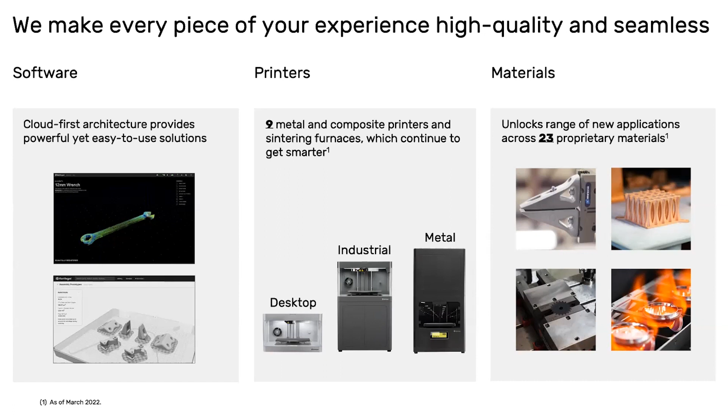So that starts with our software. When you upload your part, slice it, and set it up for success. We've spent a bunch of time and effort to curate and cultivate an experience that's really seamless, simple, and easy for you to use, where you kind of get the highest ratio of limited user input to great parts out with a bunch of great capabilities. I'll talk a little bit about the materials and the hardware in a second here.

The printers themselves are purpose-built to print really, really great quality every time. So if you've taken a look at our website, you've probably seen all the little details that go into making these printers super robust and accurate. I call attention to the unibody chassis of solid hunk of aluminum under the hood of the printer that helps to resist sort of the micro torques that arise from the belt drive system.

And we've got 9 printers across the fleet that are really sort of purpose built to address different stages of the product lifecycle and different applications. We'll talk a lot about applications in the context of this call today.

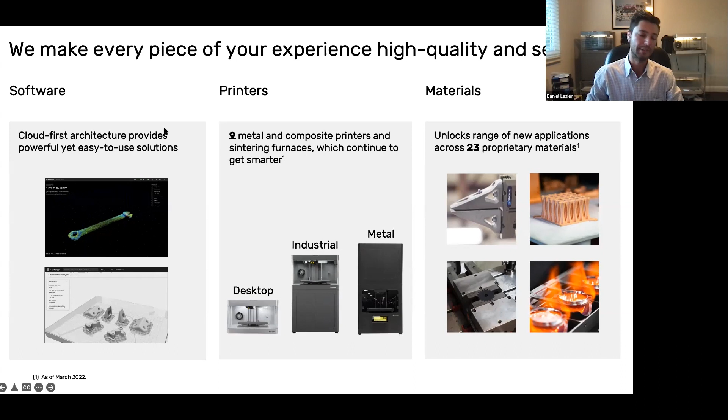With the introduction of Precise PLA, we've now got 23 unique and proprietary materials. I think that if I were to take one point from this slide, it's that each of these elements, software, printers, materials, are all tightly integrated so that the interfaces between them really feel like one unified experience. And this really results in a great end user output that really sort of manifests itself in the quality of the parts that I get every time out of the printer.

Just to shine a spotlight on the hardware itself, if you're looking at my camera screen here, you can see I'm lucky enough to have 3 of these machines in my home here. I've got the industrial series over my right shoulder here. I got the desktop series. I'd like you to meet Laura at the top there. This is Sherman down below. Over my right here, this is Big Mike. So we got a happy little family here in my home office in San Diego, California.

So the desktop series is our most mature platform of all of these. Our first generation we launched back in 2014, but this latest iteration of it came out in 2016. And it's really devoted to professional use cases, but it's simple enough to go right on your desk. I contend this is the most powerful manufacturing equipment you can fit on your desk. And it takes about the power of 1.5 light bulbs to run it, which is pretty crazy when you think about the kind of use cases and applications you can address with that piece of equipment.

The industrial series is sort of the broader extension of that platform, purpose-built to address more nuanced applications where I might need flame retardant materials or ESD safe materials. The really cool thing about the industrial series is that it brings in a layer of automation and accuracy by way of, it's actually equipped with a laser on board. That laser not only does calibration at the front end of your print process, it can also do inspection and some automated quality control on board that machine.

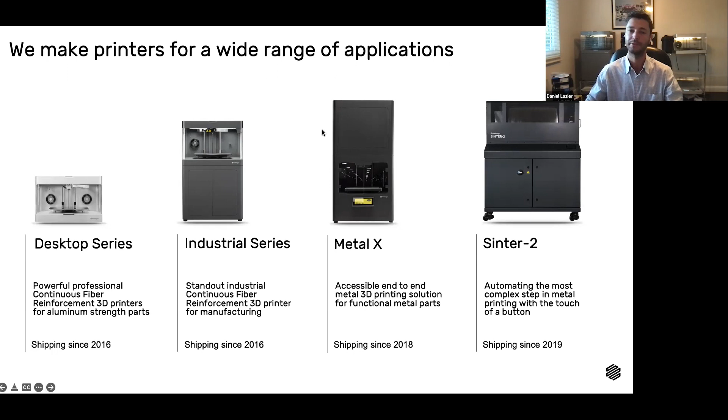We do have a pretty impressive range of plastics themselves. So Onyx is a material that we invented. Onyx is a nylon that itself is doped with chopped carbon fiber particles. Those chopped carbon fiber particles do a couple cool things to the part. So one, it makes it stronger, boosts the strength by about 40%. The second thing it does is it actually makes it a lot more stable from a print process standpoint. The chopped carbon fiber causes the nylon to have a lower coefficient of thermal expansion, meaning you're going to get less warping, peeling. Some of the usual suspects from the early days of 3D printing with ABS and PLA that make it a little bit more frustrating to use.

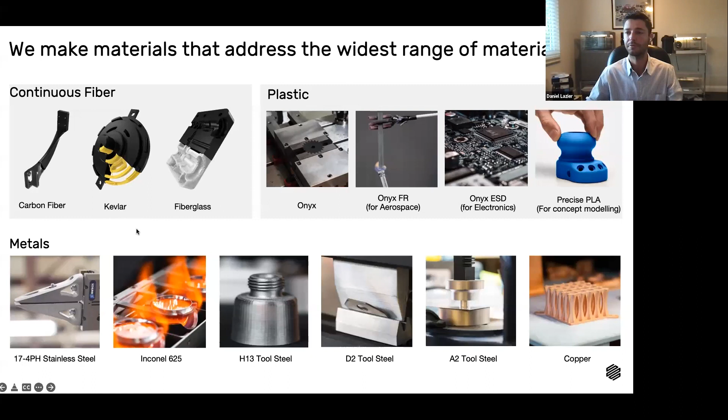I'll briefly mention, so the metals, less of a focus of today's conversation, but we started off when we released the system with 17-4 stainless steel, which is great for sort of generalist high strength prototyping applications. And then from there we went into some specialty tool steels, including H13 tool steel, D2, A2 tool steel. And then we have some specialty alloys as well. So we have Inconel 625, which is great for temperature resistance and chemical resistance. And then our most recent addition to this library is copper, which of course is great for both electrical and thermal conductivity.

So let's talk a little bit more about this Precise PLA. What is it? What makes it precise? What colors can I use it for? Just some of the basics here. So Precise PLA comes in 8 different colors. So we got gray, blue, green, red, orange, yellow, white, and black, which is a pretty comprehensive library.

I've been having a blast printing with it myself. One of the things, it's not complete yet, but I downloaded this excavator design, which I'm printing for my nephew. I'm seeing him this weekend. So I've been having a lot of fun with it, and the quality's been great.

What makes it Precise PLA? What makes it different from other PLA? Really, the secret sauce, if I were to point to any one thing, is again this tight integration between the materials, the printers, and the software. So the team put just an insane amount of time into testing a bunch of different geometries across a bunch of different print profiles, and sort of purpose tuning the system to print our precise version of PLA with incredible accuracy and repeatability. So when I put that material into the printer, I know it's gonna have a great part out every time.

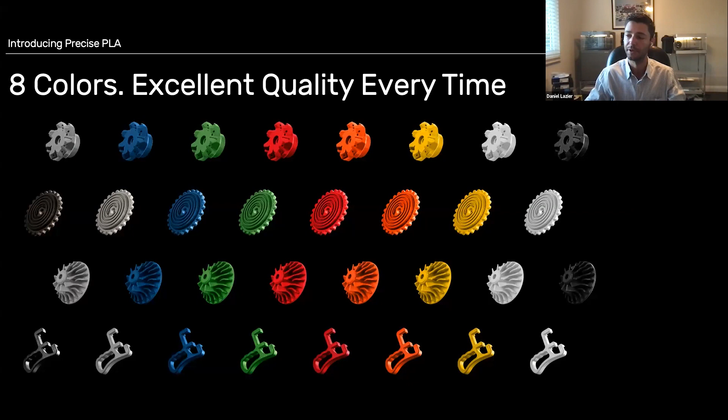So at the low end, we have the Onyx One. That's our lowest cost offering, just shy of $5,000. And the Onyx One, it just prints Onyx. I like to think of it kind of like the In-N-Out hamburger, which we have here on the West Coast of the United States. They really just do one thing, and they do it super well with great repeatability. And that's really what makes that print system great. People love this printer because of its simplicity and just the consistency with which it prints that material.

The Onyx Pro is our next offering up this line, which is around $9,600 US. That print system does Onyx with Precise PLA. So that's the first one that introduces these materials devoted to concept modeling. And it also brings to the table the continuous fiberglass material, which is really great for moderate loads. So I would think of tools, fixtures, robot grippers, all those pretty solid applications for continuous fiberglass.

The Mark Two is our top of the line printer here. That's about $20,000 US. So that's gonna bring into the platform, incremental to the Onyx Pro, a different plastic which we call nylon white. It's just a general nylon. Really where people use that is bushings, bearing surfaces, things that need low surface friction.

And then I'm adding a couple incremental continuous fibers here too. I'm bringing in carbon fiber, I'm bringing in continuous Kevlar, and then beyond just the base fiberglass, I actually have a fiberglass devoted to high strength and high temperature applications. That's really great if I need to make prototype injection mold tools, or potentially welding fixtures or other things that are going to be exposed to a lot of heat.

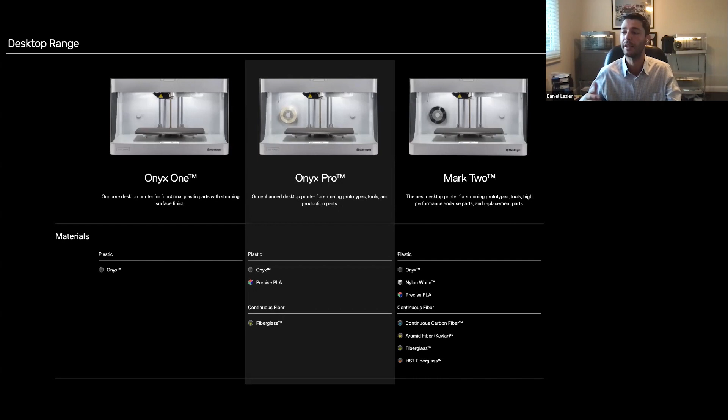So to summarize what we've got on the desktop series: we've got the fibers, we've got Onyx, we also have nylon white not pictured here, and we've got Precise PLA. And when I look at this materials list, I'm not really wanting for any additional material. When I imagine the kind of things that I want to do in manufacturing, I'm generally looking for great tensile strength, great compressive strength, great impact resistance, great heat resistance, great chemical resistance, low cost for prototypes. And when I think about all those attributes, this really covers that well.

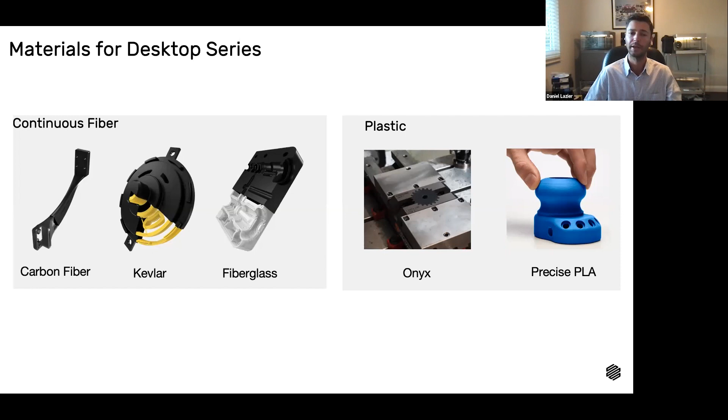So when I line up those requirements and compare them to what else is commercially available today, across these properties, tensile strength, temp resistance, chemical resistance, impact resistance, cost effectiveness for prototyping, the surface finish, Onyx has this really stable print process. I can show you this part here. It almost looks injection molded because I can't see the layer lines on it. So when I add up all these properties, we're covering the most expansive set of properties with a versatility that's unmatched across other desktop FFF machines.

FFF, for those unfamiliar, stands for fused filament fabrication. You might also be familiar with the term FDM, which was coined, I believe, by Stratasys. That really just means I'm extruding a material from a spool out of a hot nozzle.

We have more of a comment here about the pricing. That's a decision-making factor in how people look at this, specifically the cost effectiveness on a per part basis. Before we released Precise PLA, a lot of customers told us, "Hey, I love your equipment, but I'm only sticking with tooling or production parts on my Markforged platform. When I need cost-effective prototypes or concept models or fit checks, that could be accomplished on a lower cost machine."

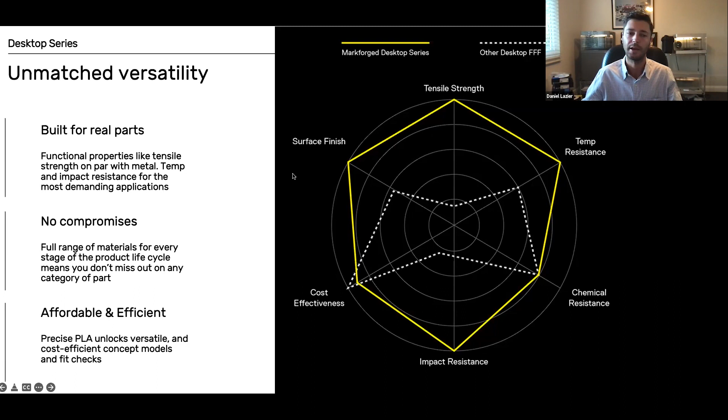Cool. So just moving along. I mentioned different applications, different phases of the product life cycle. I'd like to spend a little time talking about the application itself. So dividing this up by the product life cycle phase: Do I need a visual prototype? Do I need a functional prototype? Do I need a tool or fixture? Or am I actually looking at production parts?

I would really recommend Precise PLA anytime you're looking for something that needs a pretty solid appearance and accuracy. I need some colors, or I need low cost. That's going to be the realm of use cases where we would definitely recommend Precise PLA.

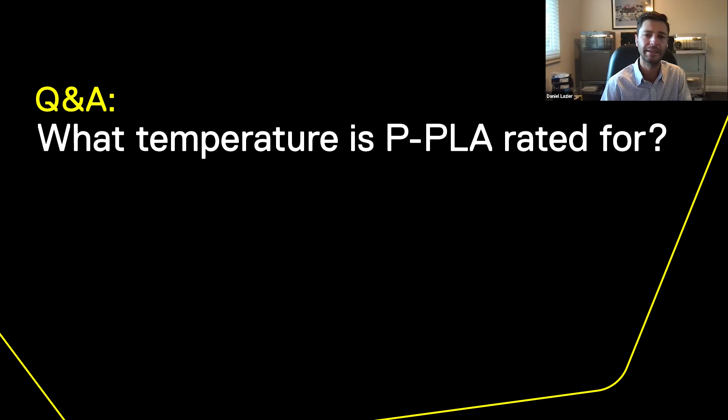There's a question here about the temperature that Precise PLA is rated for. I believe we have that heat deflection temperature in that data sheet. I think it's somewhere around 50 Celsius.

Another question here about dimensional accuracy. We haven't characterized the accuracy of Precise PLA yet. It's something we're in the process of doing. But what I will say is generally, if you're looking for super precise, super accurate parts, Precise PLA is going to be a great entry point to that. I've been finding that my Onyx parts and my fiberglass and carbon fiber parts generally come out with slightly better accuracy. I know that's not a numerical answer, but just qualitatively, that's what I've observed just printing on my own.

Cool. So getting back to this application map here. So I mentioned we do Precise PLA for whenever I need low cost or colored concept models, fit checks, and prototypes. When would I go to Onyx? It's really when I need a great surface finish or if I need an incremental boost in either accuracy or strength. So we see customers using both of those materials for prototyping, depending on what the technical requirements are.

In fact, I've also seen people that need great strength in their prototypes. They need to validate a design and actually apply physical loads to it. In which case, we see customers going to Onyx and fiberglass, or even something sturdier like carbon fiber. Beyond that, let's say we really need some really functional tools. So sometimes I need like a robot gripper or a work holding tool that's going to hold something in a machine vise. And sometimes those things actually need a pretty good boost in strength. In those cases, I would go to Onyx and I would reinforce it with fiberglass.

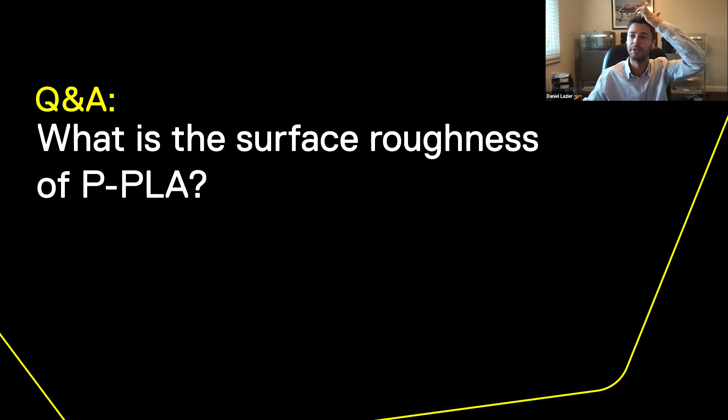What I would recommend is if you're really looking carefully at the system and the Markforged platform, either come find us at a trade show or meet up with one of our value-added resellers, where you can just go observe some of these parts in person. Again, I'll try to showcase this part that I printed this morning. It's actually quite difficult to even see the layer lines that are typical of a 3D printed part.

Another fun question here: is there a recommended bonding method, either two-part adhesive or chemical welding, for each of these materials? I'm not quite as sure for Precise PLA. Let me file that away as something to follow up on. But frankly, just your typical super glue, cyanoacrylate, is a really good start. Specifically, Loctite 401 is a subclass of that that actually forms a really great, super strong chemical bond between two Onyx parts.

I think there's a separate Loctite that does really well for Onyx to metal parts. There's also a Scotch-Weld adhesive that works really well for Onyx to metal parts. For Precise PLA, I've done a couple parts where I just use your typical cyanoacrylate super glue.

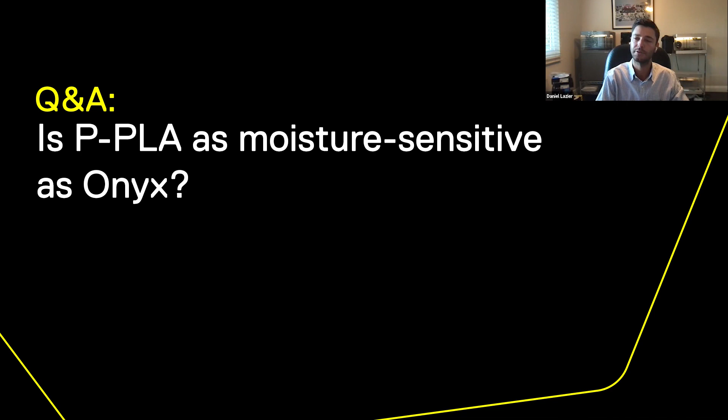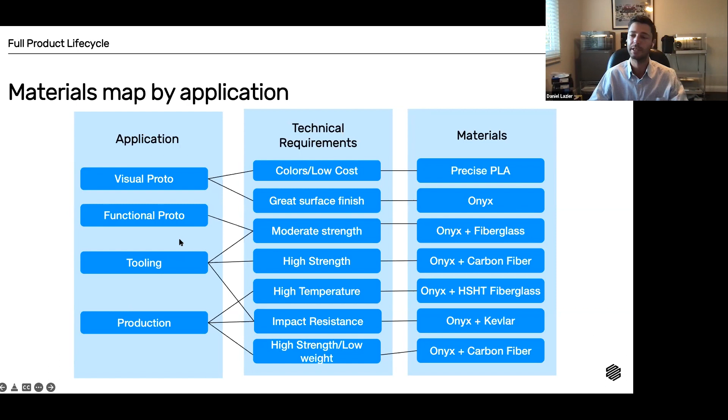Cool. So getting back to the slide here, the overall takeaway between the last slide that showed that radar chart and this slide that actually maps out these materials' different applications: we have a really broad range of use cases that you can address with just one printer on one platform. That really brings to you as users a versatility and a set of capabilities that you really can't match with any other FFF style printer.

So to give you a practical example here, this is a bracket that I worked on with a customer, an academic institution that's competing in Formula SAE, which is a national competition where they actually develop a race car. This bracket here is a bell crank suspension specifically for that race car, and it's got to be lightweight, it's got to be strong, and it's got to be accurate. So when I first started down this road of designing this thing, I first wanted to check to make sure the thing fits.

So going from back to front in the process, I first took the design itself and just made a shape that fit. In the next phase, I started to whittle away some material to make some weight optimizations and also do some design for assembly stuff, to make it a little easier for the whole thing to come together. In this third iteration, now I'm really starting to get this thing optimized for weight. I've got all of the different hardware and fitting and other mechanical and design considerations in there. And then I finally end up at my final part, which I've made with Onyx reinforced with continuous carbon fiber. And now that part is fully optimized and ready for production.

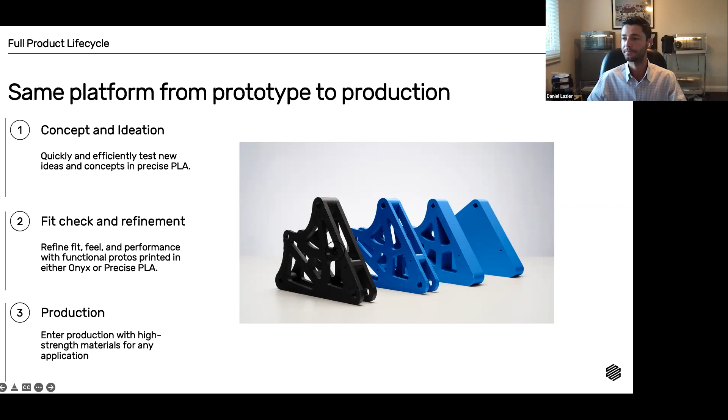Separate question here: would Precise PLA be satisfactory for takeout dining utensils? Again, we don't really have anything in the platform that's devoted to food safe use cases or applications. But again, that's going to be something that we should just kind of keep an eye on as we continue to innovate and deliver new materials.

Is there a possibility to export the Eiger model with its infill to do finite element analysis? We don't have that tool today, but what I will say is our software is getting smarter. Like I think I see an update come through on Eiger every week or two. So that's another case where we don't have it today, but it's certainly something we see our customers have a need for.

Got a question specific to the metal printers. Not exactly the focus of conversation today, but I think it's relevant in that we have a question here about downtime for alternating materials on the metal printers. Across all of our print systems, they're all just fed by a spool. So the process takes 2 to 3 minutes of just heating up the printer, getting the material flowing through the nozzle, snipping it where we want to cut it off, and then loading up the next spool of material.

So whether I'm changing from 17-4 stainless steel to copper on my metal printer, or if I'm switching from Precise PLA to Onyx on my composite printer, that process is a matter of minutes, and it's super simple. Cool. Again, thanks for the questions, and keep them coming.

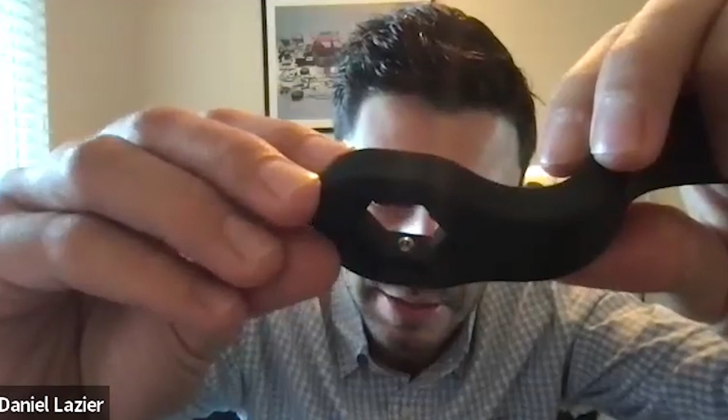It needs to be relatively attractive because it's going to be a production part that's actually going to be facing customers. So you can see I've actually labeled this thing with this carbon fiber, and that came out really smooth and slick. And then really maybe the most interesting feature of this part is I've actually pressed in a secondary set of hardware in the form of these little ball detents, which you can see under the surface here. And really what that's for is this socket, which itself was printed on our MetalX platform.

So what happens is with those ball detents, when I snap this part in, it has this really satisfying kind of almost production feel to it. Very satisfying, very ergonomic, and sort of has that almost Apple level quality of usage and the feel to it.

And this is great here because I see there's another question about what's the price comparison of Precise PLA with some of our other materials. So Onyx is $189 per 800 cc spool of material. Precise PLA comes in 600 cc spools, and that material is going to go for about $50. So in practice, when you're comparing apples to apples volumetrically, Precise PLA is a little over a third of the price of Onyx.

And I'm actually going to show you in practice when I was designing this wrench and fine tuning that nice satisfying feel along with how I wanted this handle to feel and how I wanted that text to show up, I did a bunch of iterations of that part. And I was actually conscious about the price of these parts. So for that reason, I wanted to stick in PLA before I moved to the more expensive materials. So let's go ahead and explore that process now.

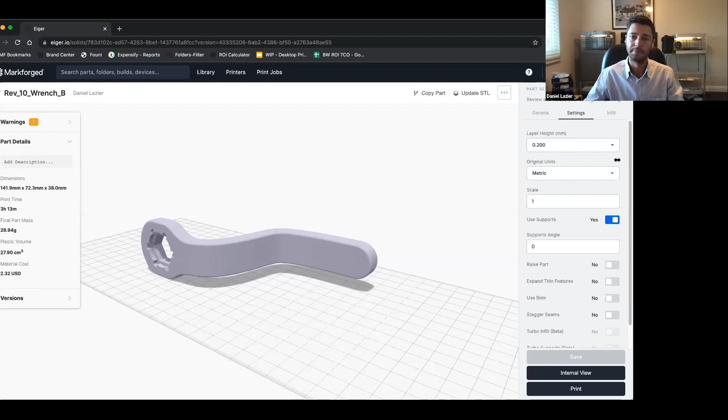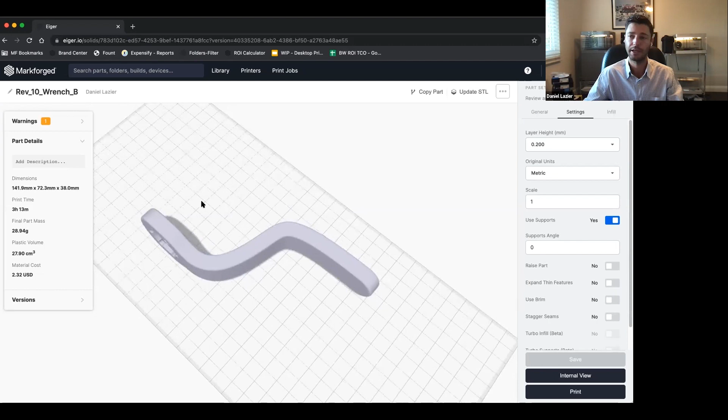So this is Eiger. If you're not familiar with Eiger, it's our cloud-based slicer and parts management platform. It's super simple to use. It's accessible anywhere. You can access it from Google Chrome. So all I do to get here is I type in eiger.io and then it takes me here. You can register and create a free account at any point. And you really never have to pay for it unless you're accessing some of our Fleet Eiger capabilities, which are devoted to doing some interesting team management, version control type of processes.

So I've got this part set up to print in Precise PLA. In this case, I've selected red material. I can really select any color.

And I have it printing at 200 microns, which I would think of almost as a draft mode. And then in this panel here on the left side, what's kind of cool about Eiger is it's always keeping track of how much material I'm using, what the print time is going to be, and what it's going to cost me. So in this case, this is going to cost me $2.30. Not bad for a part that's pretty substantial in volume.

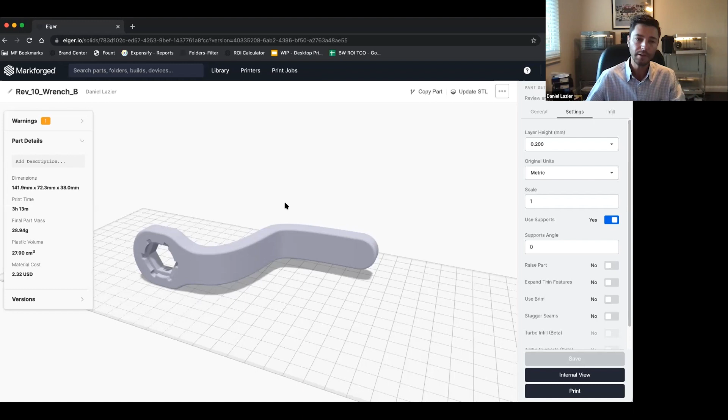I've got some support material in there. This is a cost and print time where I feel comfortable doing a lot of iterations to really go for style points, which really gives me the freedom to ideate and create and really get to that fine tune.

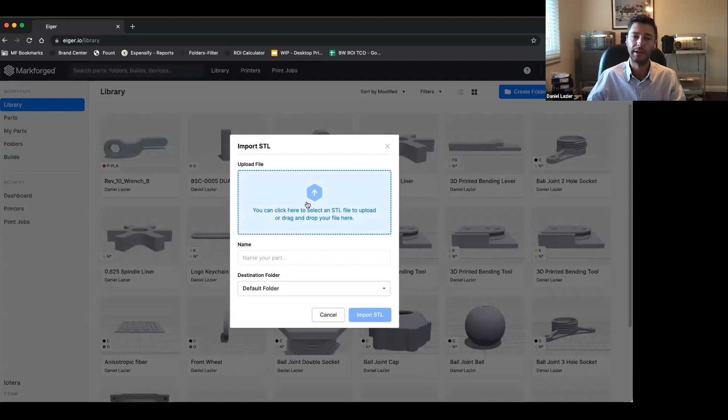A couple of questions here. Which commercial software is your software compatible with? So when I want to bring a part into Eiger, let's just back up into my part library here. All I do is import what's called an STL file. STL files are exportable from pretty much any CAD software. So let's do that bell crank that we looked at before. This is a component of that assembly.

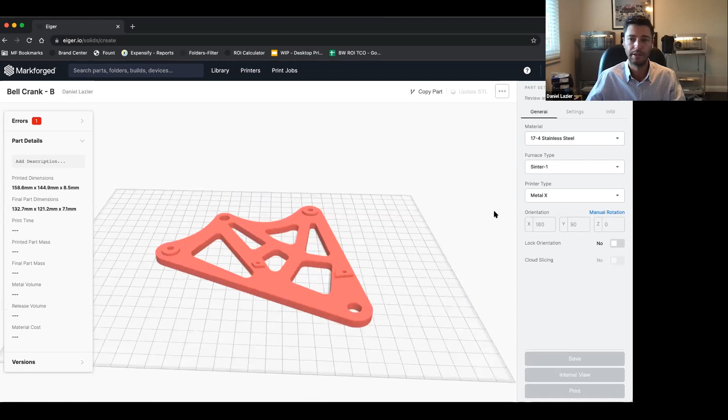So all I do is import the STL and then bring it in. And then let's say I want it to be Precise PLA. So that's all that it takes to go from your CAD software to our Eiger software. Super simple to use, very quick and efficient. And again, any CAD platform you use, whether it's Autodesk, SolidWorks, or PTC, all of those software platforms are going to have the capability to export an STL file.

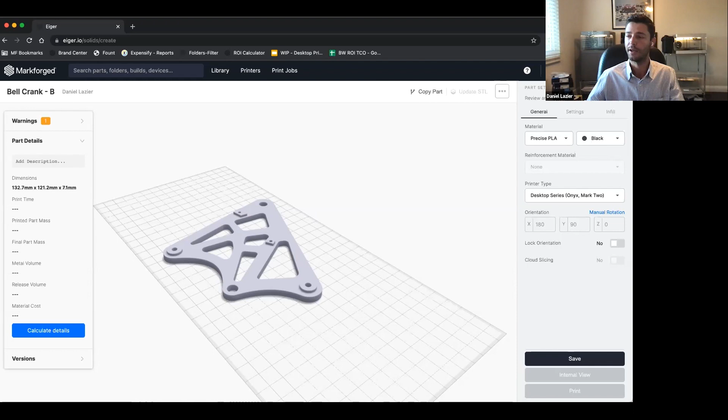Another question here. When will Precise PLA be available for purchase in Brazil? If I'm not mistaken, we have partners already in Brazil that have ordered some. We can definitely follow up on the back end and get you in touch with the people that are supplying that in Brazil.

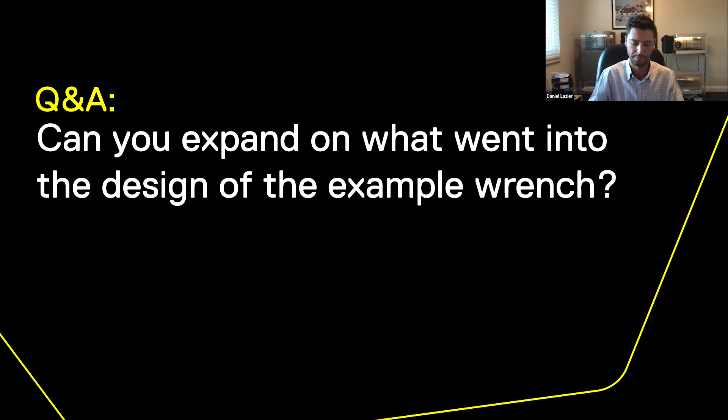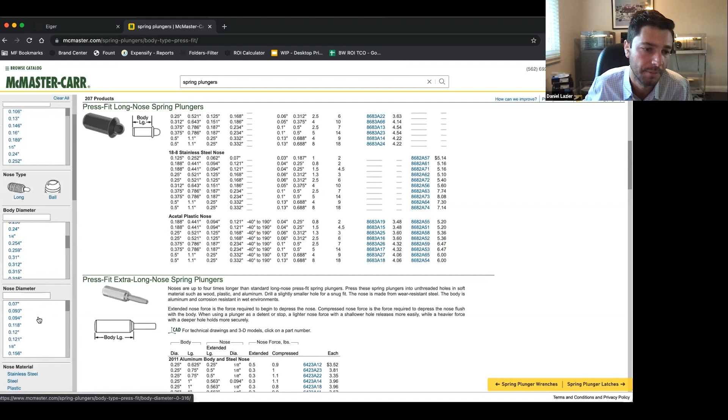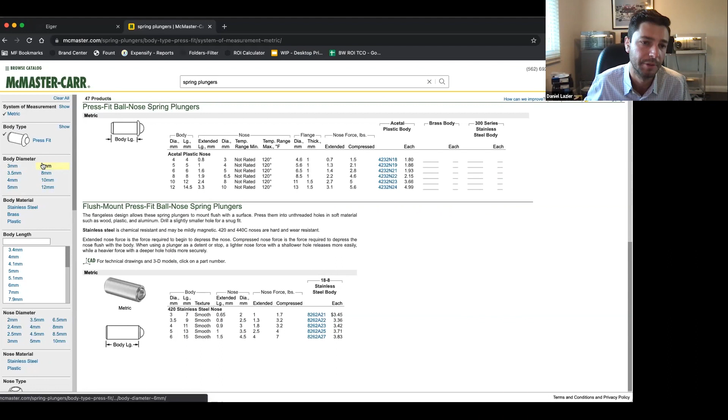Just a question here again about the design of the wrench itself. So what was that part that went in there? So McMaster-Carr. I ordered this part. This is a spring plunger, specifically called a ball detent. And I did a press fit, and I believe the one I ordered was metric. I'm gonna try to find the exact one just so you can see what we were working with. I happen to know the diameter was 6 millimeters, and the length was also 6 millimeters.

So it's probably one of these. It was stainless steel, in fact. So I bet I bought this one. On McMaster, you can just download the part. So I just downloaded the part and then fit the design to support this press fit. I just designed a cylindrical blind cut in there. And I'll be honest with you, it took me a few iterations to really fine tune the fit that I wanted and get to a point where it's easy to assemble.

Not to mention the design of the cavity where this socket was supposed to go, designing that so that it fit perfectly. You can see I got these depressions on that surface of the socket. So just getting that interface to work really nicely took a lot of iterations, and that's really where Precise PLA comes into play.

Are there different temperature properties that are important in selecting the color of P-PLA? Or can I just leave the color the same in Eiger software and simply change the spool color? To be perfectly candid, right now, I believe the profiles are all the same, but the team is constantly fine tuning it. And we are noticing very, very minor variances across colors in terms of what prints best. So I wouldn't be surprised if the team released a software update that made the extrusion and temperature profiles more color specific as well.

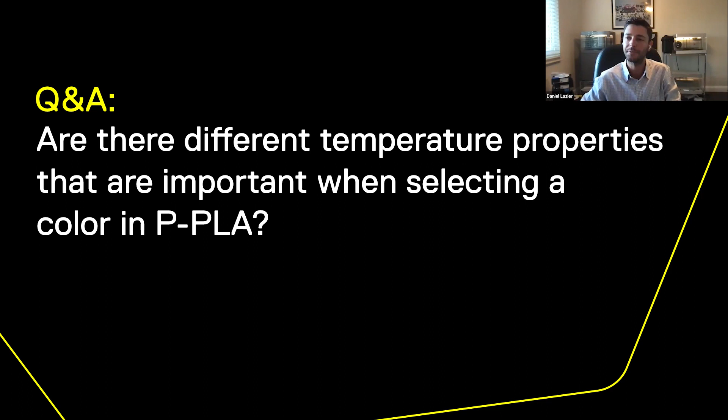What does the color choice do in Eiger? The colors, whatever loaded in. That's right. So it will actually check the compatibility. So when you load it in the printer, it will ask you what color spool with Precise PLA you're loading, and then you'll actually want to make sure you're lining up with that in software.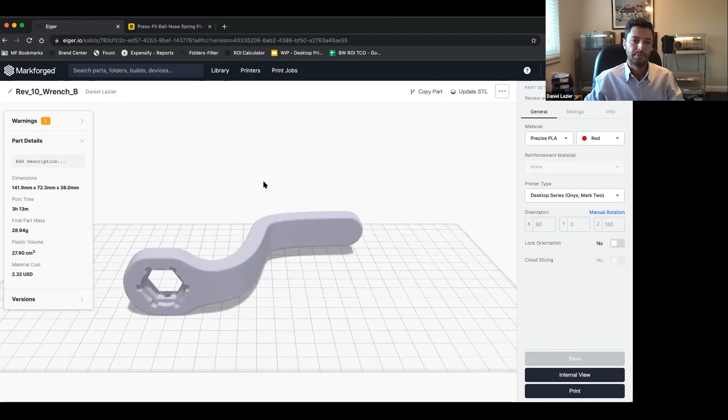So going back to Eiger, I'm actually going to go back to this wrench part that we had going in red Precise PLA. So I've got my wrench here. Let's go take a look at the internal view just to see how Eiger is going to slice and print this part. So in this view, the purple material is all support material, and then the rest of this body is going to be the actual end part material.

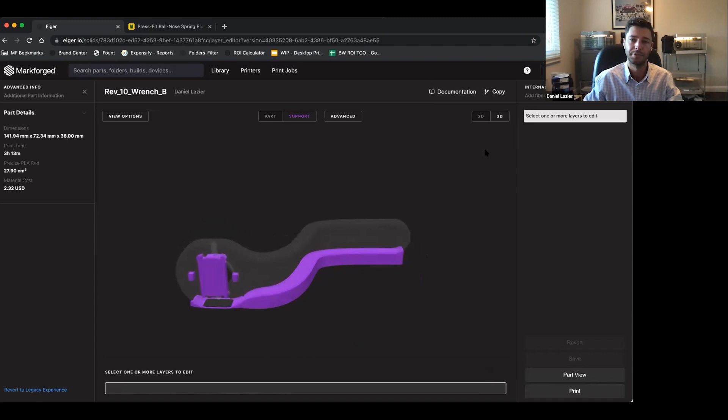So as I slice through this part, and you can think of this almost like an MRI, you can see the inside of this part. We're using this efficient lattice structure to ensure we're making the best balance of part quality, strength, while also keeping the print time and cost down. So this is how it's going to print my part. I'm pretty pleased with this.

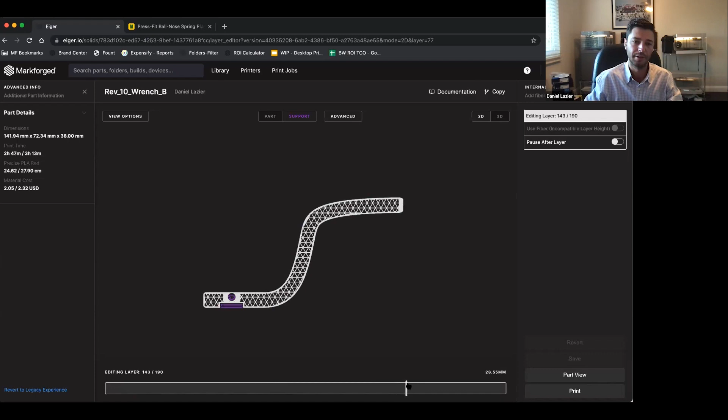You can see I've got my depressions here for the ball detents. This is where that socket's going to go. I can check to see if and how it's going to put material in there. I specifically designed those sockets so that I'm not getting a lot of support material inside of this hole. And that's a design technique I can share a little bit more about if we have time at the end of this. But really, I'm pleased with the way it's going to print this part.

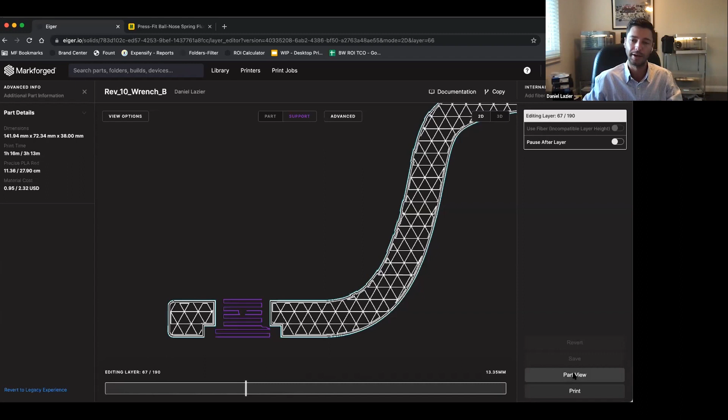So in practice, when I was designing this component, I ran a bunch of iterations like this. You can see this is Rev 10-B. You can imagine how many different iterations I went through before I got to the final one. It's definitely more than 20. And the beauty of it is it doesn't really matter because, again, we're looking at $2.32 for print cost. So now let's say I've gotten this design to where in Precise PLA, it's working exactly as I want it to.

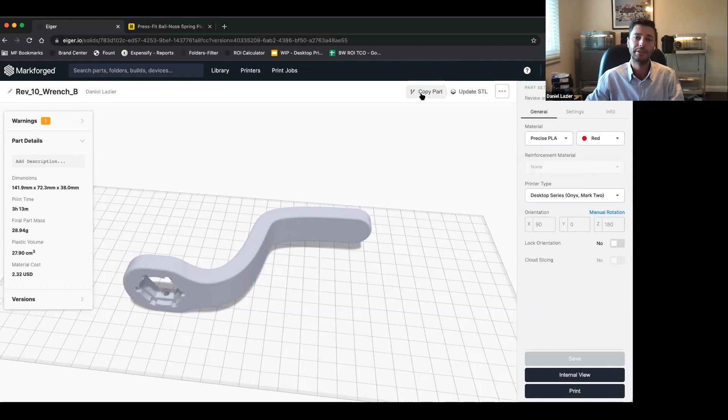What's the process now of going to Onyx and reinforcing it with continuous carbon fiber? And this is what's really cool about the platform, because if I were looking at a different type of process on a different type of platform, I have to go through that whole process of uploading, optimizing, picking orientation. I have to do that all over again. So really, when I did this, all I did was use this feature here, copy part. This just makes a new version. I'm just going to say dash carbon fiber for this one.

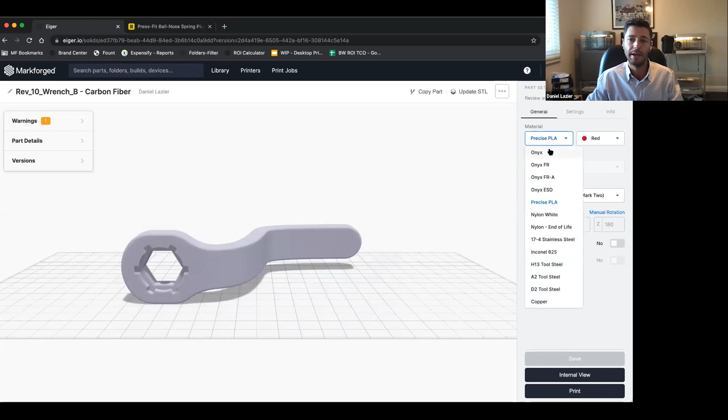So now I've got my copy. I can always go back to my Precise PLA version through this panel here that's managing my versions. And now I'm just going to say, okay, I want this printed in Onyx, and I'd like it to be reinforced with continuous carbon fiber. And I'm going to go ahead and save that. It's going to just take a moment to slice that.

Just a question on transitioning from Precise PLA to Onyx. Is the accuracy across the two materials such that when I refine and design in Precise PLA, that will transfer directly to Onyx? To be perfectly honest, I took a couple more iterations when I moved into Onyx from Precise PLA, but it saved me a lot of the heavy lifting with fine tuning some of the fit and features. So in practice, the clearance that I was looking at in Precise PLA was something like 210 microns. When I did it in Onyx, I was actually able to take that down a little bit for a firmer fit. And that's just because Onyx prints with slightly better accuracy by comparison with Precise PLA.

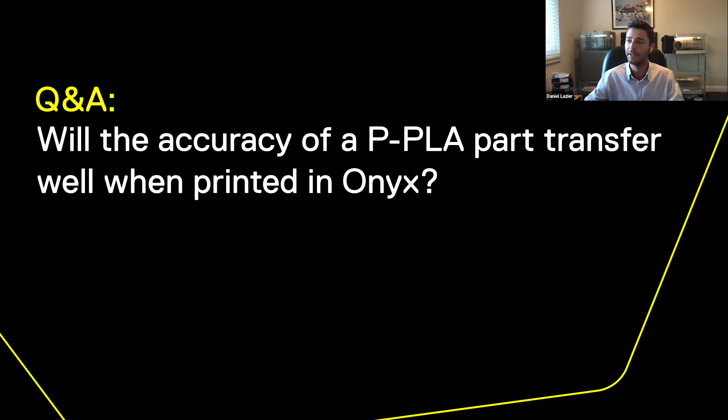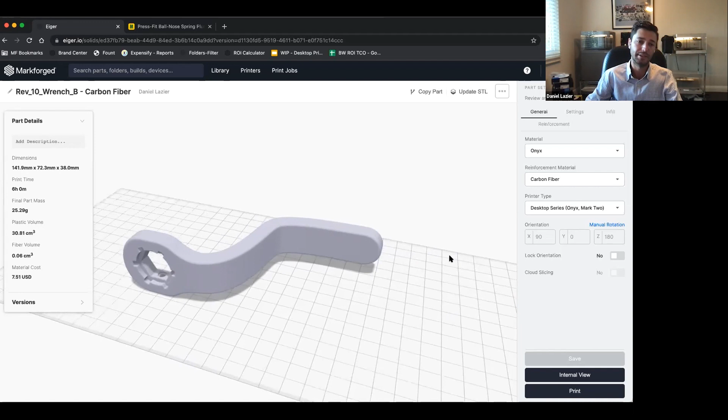Cool. So I've now sliced this part for Onyx and carbon fiber. Let's take a look at these part details. And remember, it was something like $2.30 for the Precise PLA version. I'm now looking at $7.50. So kind of a difference there right off the bat. I will say mostly this is because of the default settings with continuous carbon fiber. It's probably mostly Onyx we're looking at. So again, in keeping with this trend of Onyx being about triple the price of a part printed with Precise PLA. But you're getting better accuracy and surface finish for that.

But now let's really start to think about the strength. And some of you may be looking at this part and thinking, why the heck did he print it in that orientation? Really, the reason I printed it this way is I needed the part to have a lot of mechanical stiffness and strength.

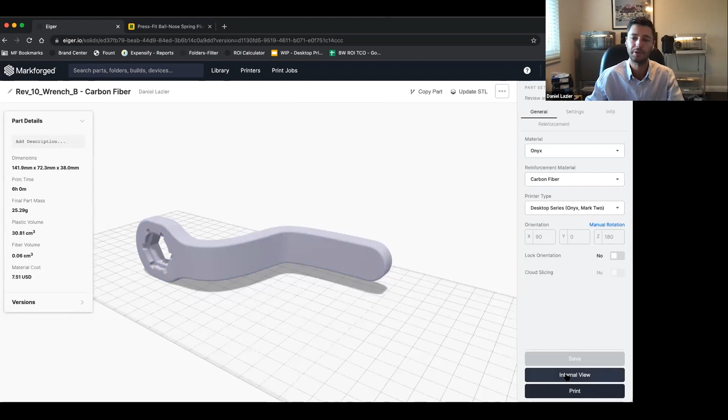So in this plane, it's got to resist bending forces. So what I'm really looking to do is put a bunch of continuous fiber in this sort of plane that's parallel with the build plate. So let's go do that. So let's look at this internal view. And you can see I've got a little smidgen of carbon fiber at the top and the bottom there.

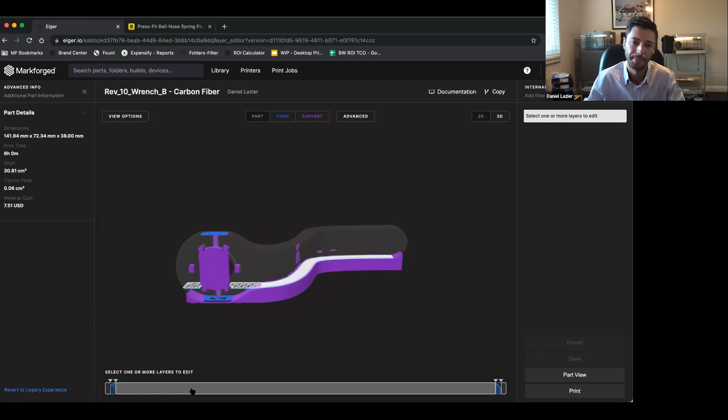That's okay, but what I'm really looking to do is bring continuous fiber into this sort of length of the wrench. So I'm just going to go ahead and find where the bottom of this feature is. It's really nice with this updated internal view. I can now sort of click and drag exactly where I want to put it. And I don't need a whole lot. So I'm going to go maybe 16 layers. And I'll try to balance it so the top and bottom are the same. So I'm just going to say create group. I'm going to use fiber in this group.

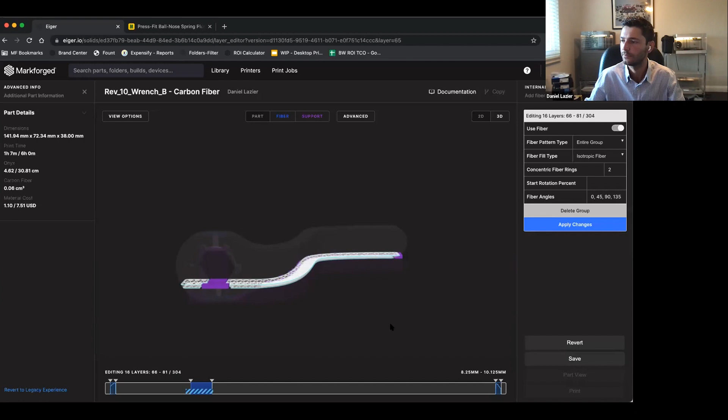And just a question here about cost. Yes, so the question here is are we talking about the cost of just making the part itself, like in total, or is this just materials? So this is just materials. Very astute point that you need to consider things like the maintenance cost of the equipment. You need to think about the cost for even the electricity to keep it running. You need to think about the cost of the machine itself, depreciated across a wide range of parts that are printed. So all of those sort of costs that go into the part are valid.

What we find is because our desktop printers are so affordable by contrast with, say, a CNC mill, generally the cost of the materials actually dominates the equation. So that's to say materials generally account for more than half the cost of printing a part when you factor in even labor, electricity, other consumables, the hardware itself.

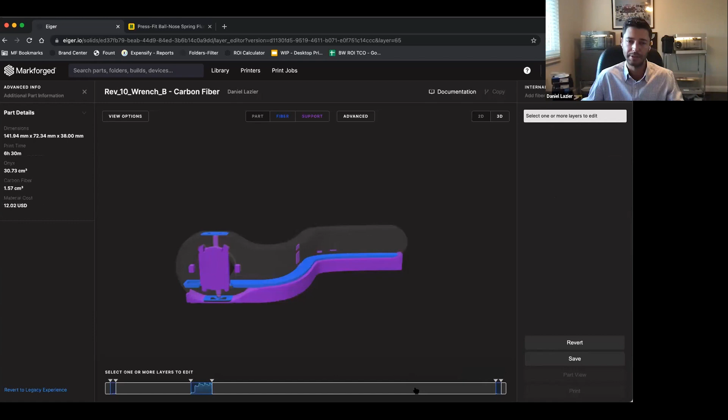Cool, so I've got my continuous fiber layer there. Again, I mentioned I kind of want to balance it. So I'm going to find the top of this feature here again, and then click and drag. And again, I had 16 layers there. So I'm going to go ahead and kind of balance that across the central axis of this thing. There we go. So I've got 16 layers selected. I'm going to do the same thing, create group. Use fiber.

Now, while this is calculating, I'll just mention, you can see this setting here, isotropic fiber. Now that's sort of how conventional continuous fiber works, where I've applied at 0 degrees, I've applied at 45 degrees, I've applied at 90 degrees, and I've applied at 135 degrees. So I've kind of got fiber going in all axes.

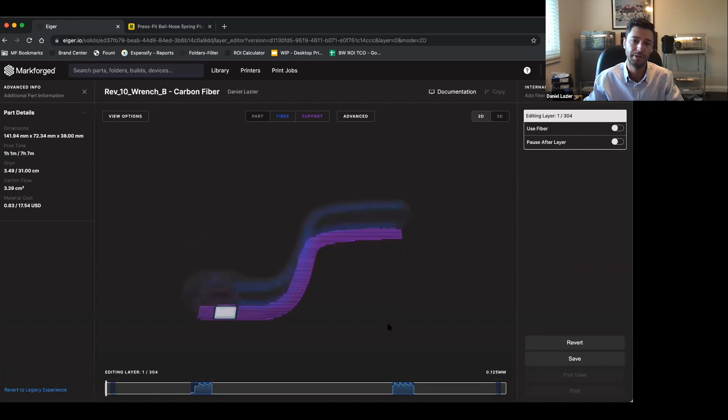So what does that mean for us when we look in this 2D view here? And let's just take a section that's printing continuous fiber. I've got some fibers going in that 0 degree direction. I got some going in that 45. I got some going to 90 and then the 135. But when I look at this, I actually don't have fibers connecting this total load path here. So really the fibers that are doing me good here are these continuous strands that are going around the outside.

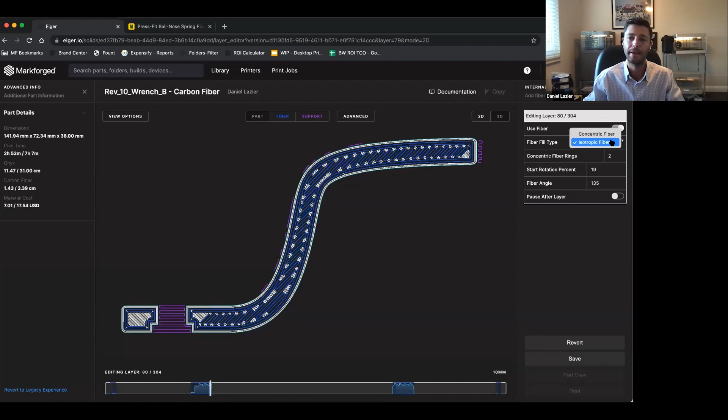And I can accomplish that exclusively with this concentric fiber ring. So I can do away with that. So that looks good there to me. I might want to boost up the strength a little more by just increasing the walls of fibers. And those strands of fibers in practice really just give me a bunch of strength. So really what I want to do here is make these whole groups concentric fiber with, let's just say, 4 walls.

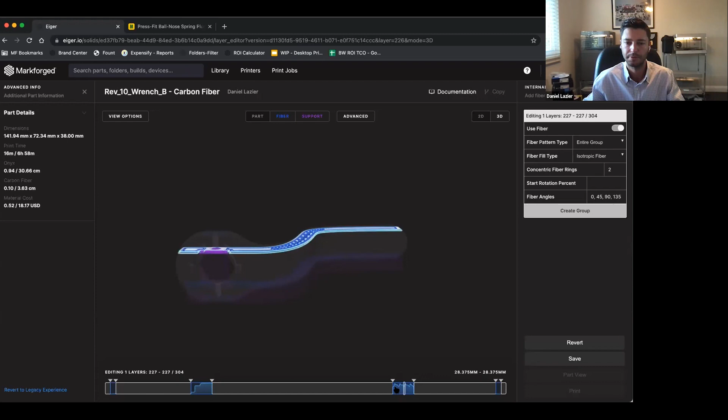Cool. So I've done that there. Now let's do the same thing on this one. Concentric fiber. Apply.

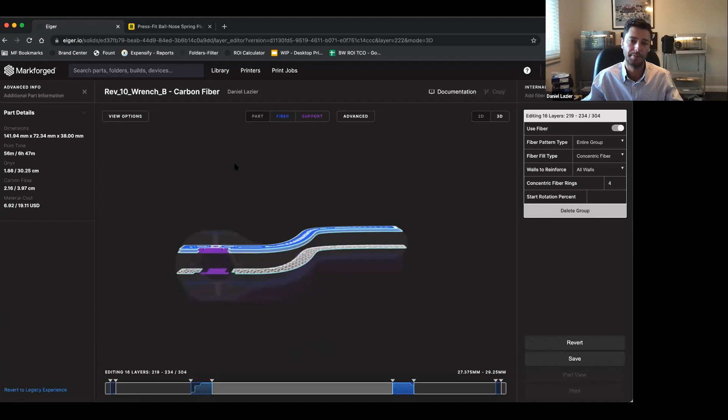Cool. So now I'm getting to a point where this part is really starting to look like a winner to me. It's going to be super, super strong in that axis where it's going to be subjected to those bending forces. And then I've got it to a point where it's going to print with those features the way I want them to. You can kind of see that breakdown of continuous fibers, support material, and that Onyx material here. Again, the Onyx is sort of the faded out material. Blue is the continuous fiber.

And we've now gotten to a cost of $19.11. And it's going to take 6 hours and 47 minutes to print this part. And again, that was by comparison to, I think it was just about a 3-hour print in Precise PLA, and somewhere around $2.32 in materials.

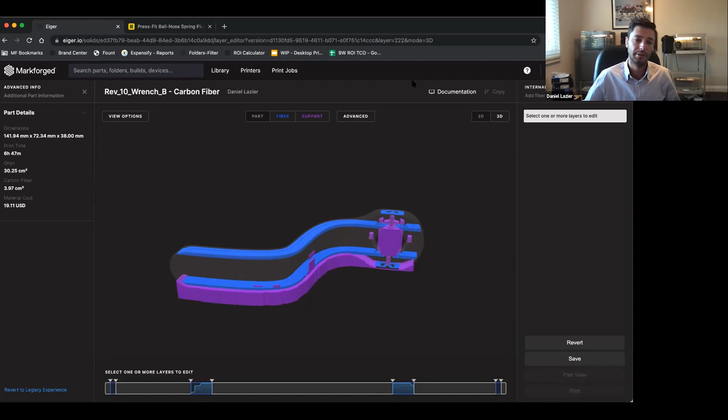So you can see we've increased the cost of this product, but now it's going to print with the capabilities that are going to go beyond just prototyping, and really suit me in some more mechanically robust applications. Namely, in this case, it's actually going to be able to work as a wrench. It's a part that I can actually use. So that's the end of the visual materials I was going to share.

I see there's a couple more questions trickling in here. Just a question: can you print Precise PLA with continuous fiber? So Precise PLA is not going to be compatible with any of the continuous fibers. So if you want to print continuous fiber, you actually are going to need to print that with an Onyx-based material. And why is that? That's really because the continuous fiber that we use only activates with a very specific type of polymer. So that's really what Onyx was purpose-built to do. So it would not be able to work with Precise PLA, unfortunately.

What are the minimum width and height for a part printing with continuous fiber? Good question. So we actually have a really comprehensive design guide on this topic, which we can definitely share as a follow-up. But as a rule of thumb, in terms of height above the print head, just to get one layer with continuous fiber, I'm going to need to be a little over 1 millimeter in height. It's going to be much more effective if you get it in thicker parts, especially due to bending forces. In terms of the thickness of a feature, we're generally looking at features that are above 4 millimeters in thickness. So 1 millimeter height above the print head, 4 millimeters in X and Y.

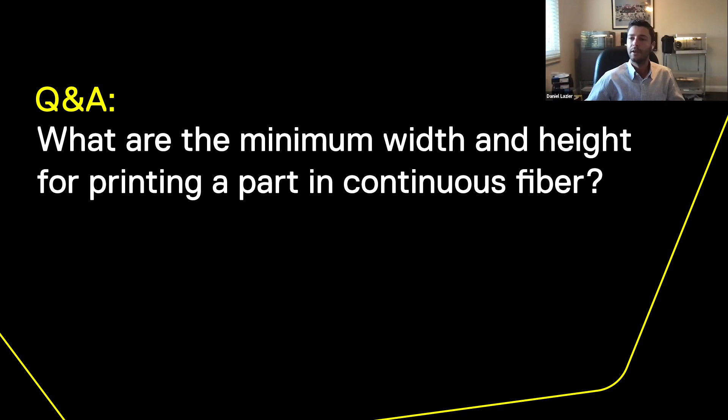Good question there. Is there a way to export a solid model from Eiger once the layup has been constructed for the purposes of FEA? Are there recommendations or white papers about doing FEA on parts with fills other than solid? Again, that's not something that we have at this point in time. We do have one software integration that I believe was with MSC. So that's a really specific type of composites modeling software that we've done some integrations with. So that would definitely be something to check out.

Can you only use Precise PLA on the desktop series? So Precise PLA today just prints on the Mark Two and the Onyx Pro. The great news there is we do have Precise PLA slated to come live on the industrial series in April. So I'm looking forward to running some Precise PLA on my friend Big Mike over here.

Another question. Can you print multicolor parts, changing the spools during the print? I haven't tried that yet. I bet it would work, but it's only going to be a transition at the layer, so at a given height.

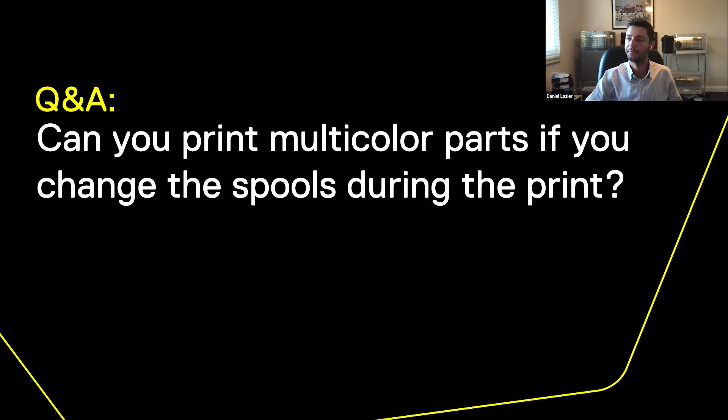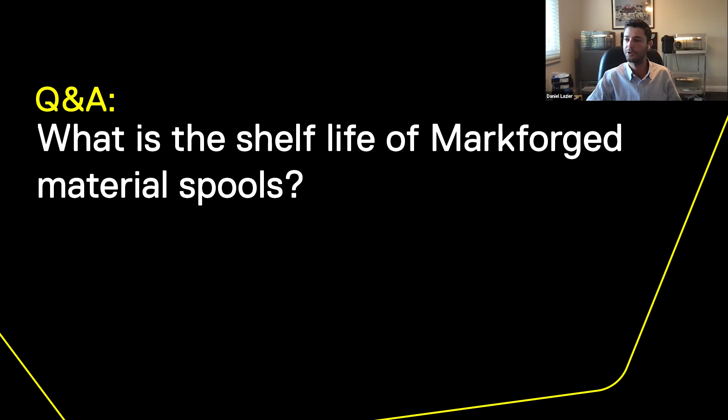Just a question about whether the material is going to age or get degraded mechanical properties. We haven't subjected it to any kind of environmental testing, but in terms of the shelf life, just sitting on the shelf, we recommend using it within 18 months of purchase.